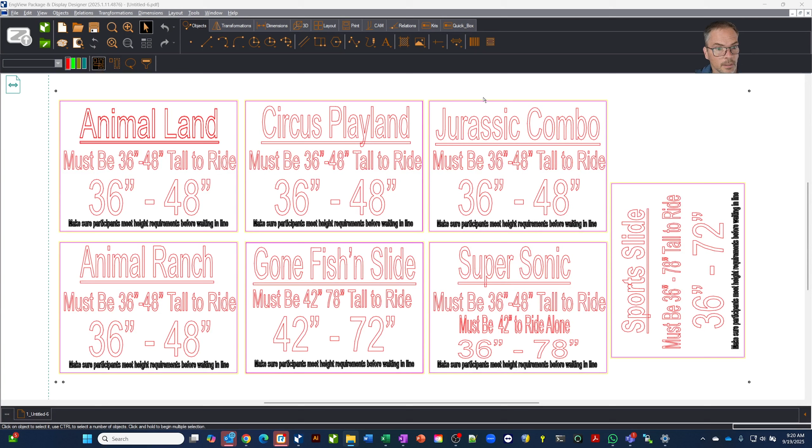And now you can see that it's basically converted everything, taking the colors out, and we're just kind of seeing the meat of what we want.

I'm going to click on that little arrow on the right here, and you're going to see styles. This is going to show you a bunch of styles, a number of default styles. I'm just going to remove all the unused styles that we don't want at the moment.

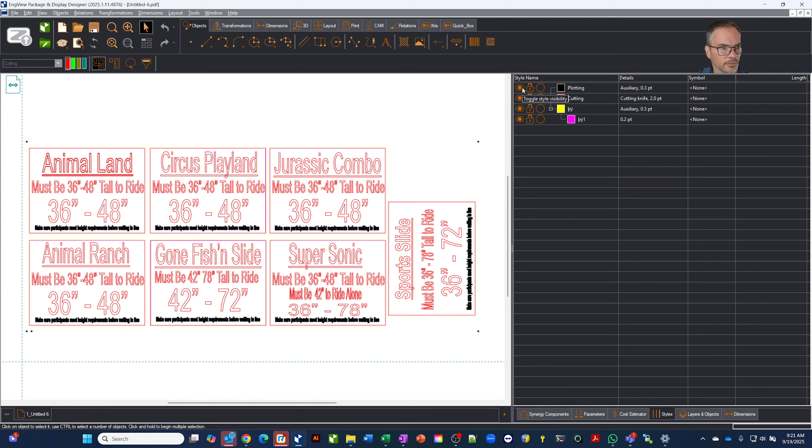We're going to try to isolate and say, what do we really want, and get it on the styles we want. So you can see this is plotting, this is cutting, this is actually something we want to cut, and here's something else we want to cut. So let's turn these off at the moment.

We'll just draw a nice square around this part, and I'm going to do Control Delete because we don't want any of that. And we'll turn back on these other layers.

Then what we can do is actually turn off plotting. Let's just draw around - this customer wanted to cut both the inside and outside lines. One to cut out the sign, and the other to create a fixture to put back on the printer to flip the signs to print the other side.

So let's take those and convert them to cutting. And now we'll remove the unused layers, or unused styles. So now we basically have a cutting one and a plotting one.

We want to see how well this really came in, because a lot of times when you draw things in Corel, you get lines on top of lines, this kind of stuff. So we have a really cool tool under transformations called the fix-it tool. And you can see right away we've got some errors here.

Now, in the case of these separated contours, because this isn't a normal packaging job, we're just saying, hey, these contours are separated, and that could be an issue. In our case it's not really an issue, but you've got all the contours, you've got the holes, and you can turn them on and off. But we really want to focus on these unconnected ends and duplicate edges, okay?

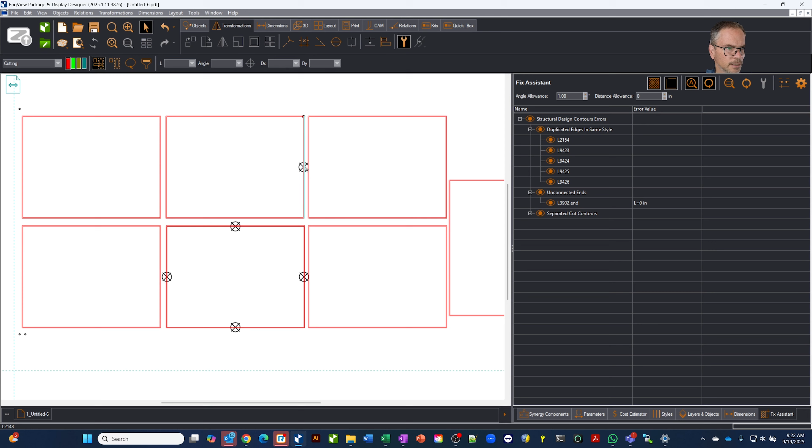And so we can start to work our way through and find them pretty easily. You can kind of see up here, this is showing us one of the unconnected ends right up there, and we have another one down here at the bottom.

So let's first get rid of some of the duplicated lines. You can see right now this has got this one checked, so I'm just going to hit that, hit Control Delete, and now it's actually filled in that whole area because we have the unconnected ends.

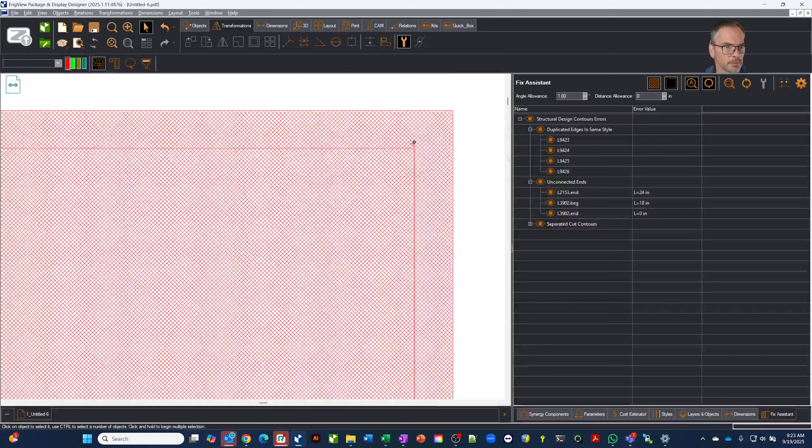So let's come in here and use our trim tool. I'm already on here, so I'll click on trim, and I'll trim this line off right here. Let's zoom way out again, and we'll zoom down to this other end, and you can see these two are not connected. So we have a nice extend tool.

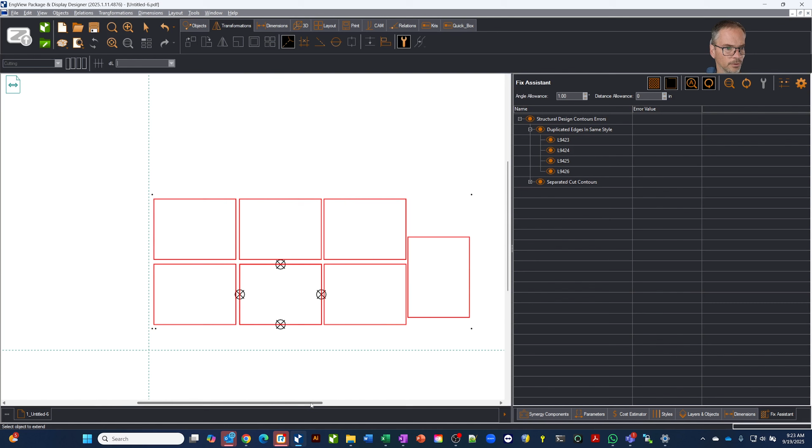We'll click on that, we'll extend, and now we've kind of cleaned that up. So we'll work our way around, and it looks like we've got four more of those overlapping lines, so we don't want them to cut twice. We'll go back to the arrow, click on this, and delete. Same thing here—click on here and delete, delete, and delete.

Okay, so you can see our tool cleanup and stuff—we've kind of taken care of everything. And we'll turn off our wrench tool. In the case of this customer, unfortunately, these three bottom registration marks actually had gotten cut off on the sheet, so he only had these two up here, which is fine. The machine can do just fine with two.

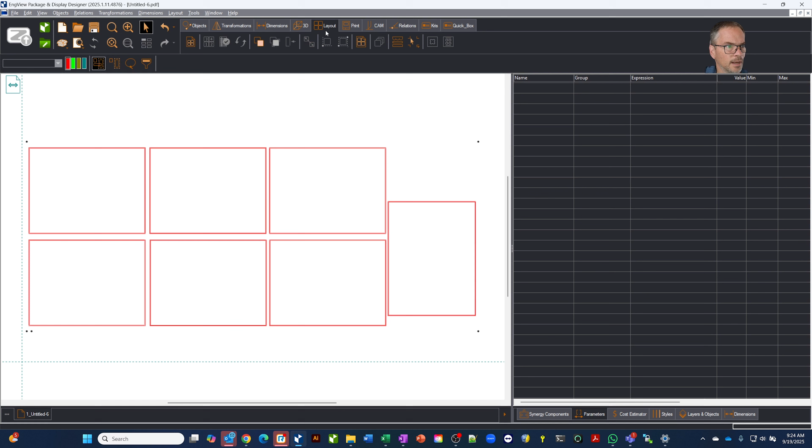So what we're going to do is go to our Layout tab, go to the registration marks or fiducials, and grab this inch fiducial. You can type in a value—I already typed in a quarter of an inch. Now we'll center this up and drop a fiducial on there, a registration mark. Okay, so now you can see, cool, we've got a couple of registration marks.

So we really don't need this plotting style anymore, so we'll turn that off. And then at this point, basically you could save this, go to File, go to Export, and export it to a PDF.

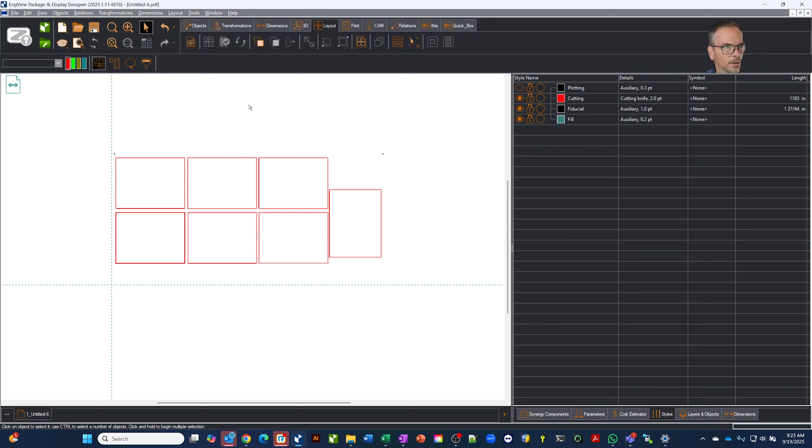Or in our case, they had the CAM module—it was actually a multi-cam machine. So we'll go and select this; we have tons of different CAM modules, I've only got a few enabled right here. And if we don't have a CAM module for your machine, we can take a look at it as long as we can get the G-code structure from the manufacturer.

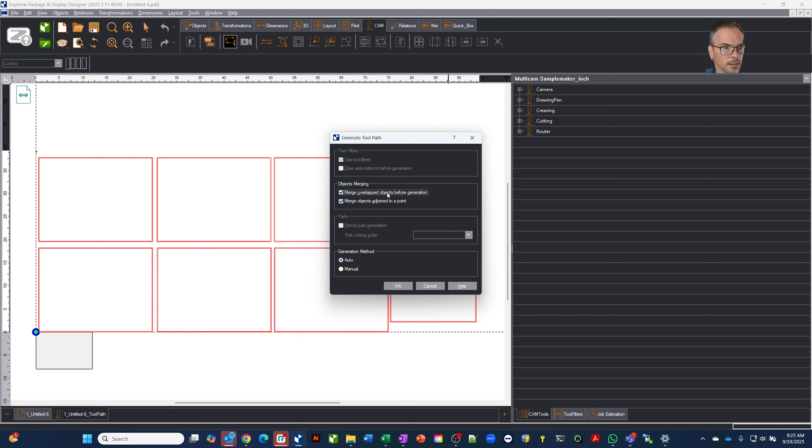In our case, I'm going to pick this Multicam Samplemaker, and I can just click on here to generate a quick tool path. If we want to see what the order looks like, we can play through it.

You can see the camera is going to go first, and then we're going to do our cutting. If we go back to the beginning, we can play through it and see the order it's going to run here—it's smart, it's going to do the insides first and the outsides second, which is great. We'll just speed that up and let it go to the end here.

All right, and then all we have to do is hit NC. We'll generate a file, and in this case, you can see here, get the G-code real quick. This just drops it into a file, a default directory, but it's going to run the camera first here—it's going to find those two fiducials, come down here, go to tool 41, and execute the rest of the code.

So, the other thing real quick—you can see in here, for example, cutting was tool 41, here's our feed rate, what's the tool-up position, do we want to cut past the bottom of the material. Notice it says inner contours first. We've got creasing, all that kind of stuff.

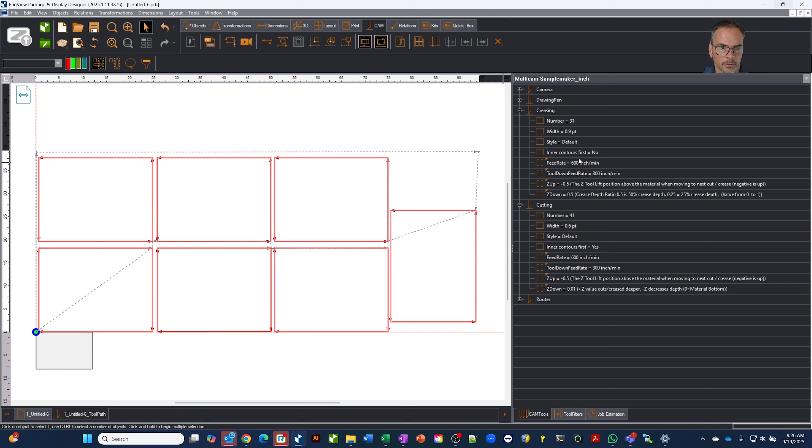And let's say we made a number of changes to this—you'll notice I have a version here called Multicam E-Flute. So anything you do, you can always come in and save these templates, so you've got a configuration ready to go. You drop this in, hit output, and you're ready to rock.

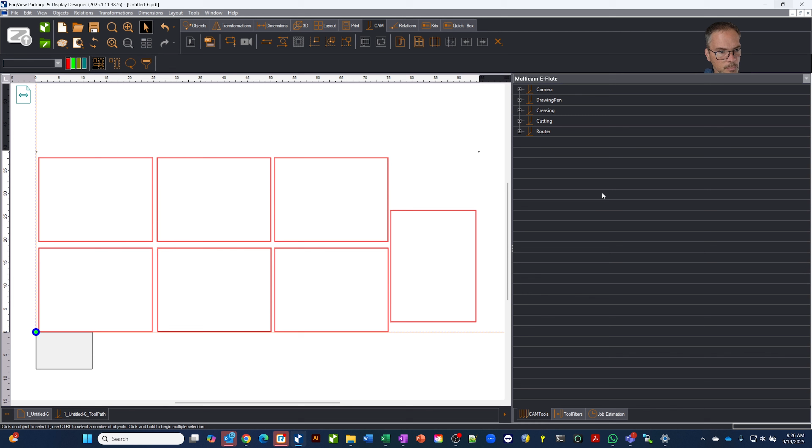So hopefully you found this useful. Like I said, we've got a lot of customers out there that not only do packaging and displays, but also do just a lot of general cutting, and we've got some cool tools for that. Thanks for watching.